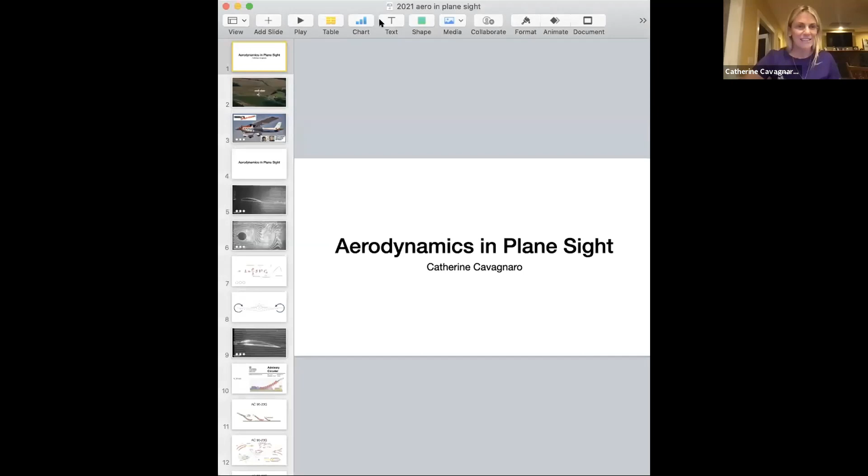Okay, so I have to say that this presentation came together in kind of a funny way. Mike and I played a bit of email tag and such, and so we set this date for me to be here sharing some aviation stuff with you. I don't know if he realizes this, but he wrote me, and I wasn't sure if we had settled on exactly the topic, but he sent me a title that said Aerodynamics in Plane Sight. And I thought, hey, that's cool. So what I ended up doing is thinking, okay, what do I want to talk about that would make sense with this title? Usually the title comes last, but in this case it came first, and I really liked the title.

I am a mathematician, and I teach at the University of the South. That's my full-time job, and I teach aerobatics, and like Mike said, I write for AOPA Pilot Magazine. I am in my happy place when my geeky math side gets in contact with my thrill, adrenaline seeking pilot side. I just love mixing math and aviation. But I'm a very visual kind of person, so I loved the title of this, Aerodynamics in Plane Sight. I love videos that help make aerodynamics accessible and interesting, and I hope you'll agree. So I've built this around some of my favorite videos. It's kind of like watching my home videos.

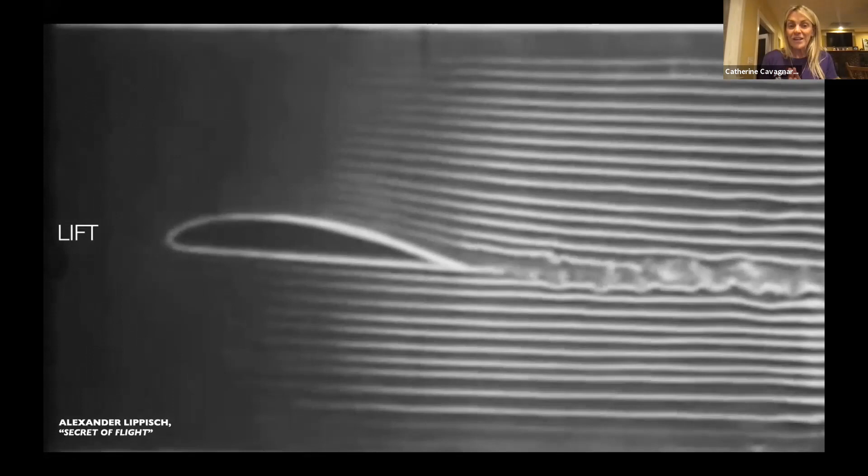All right, here is one of my favorite videos that shows, besides money, what makes airplanes fly. And the lift created by the wing is due to the differential velocity across the top and the bottom of the wing. And what I love about this video, the smoke tunnel video, is you'll see...

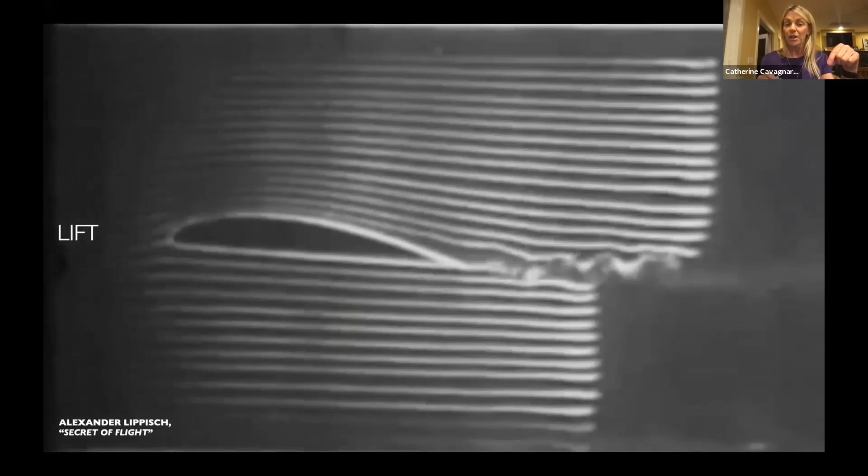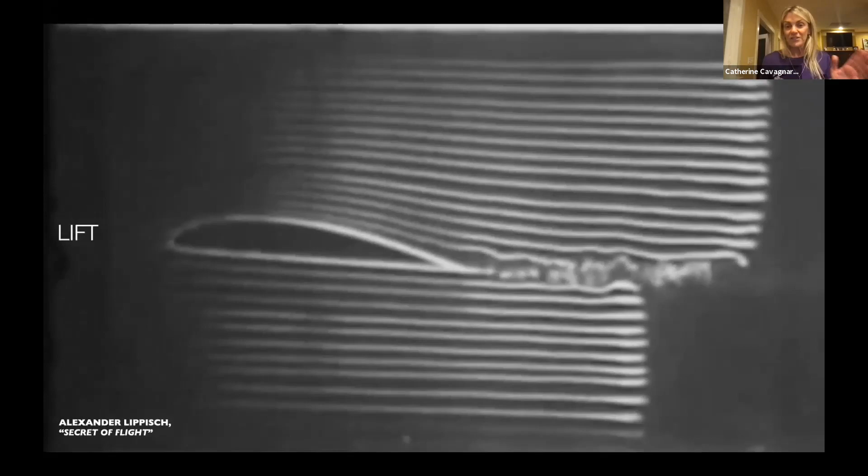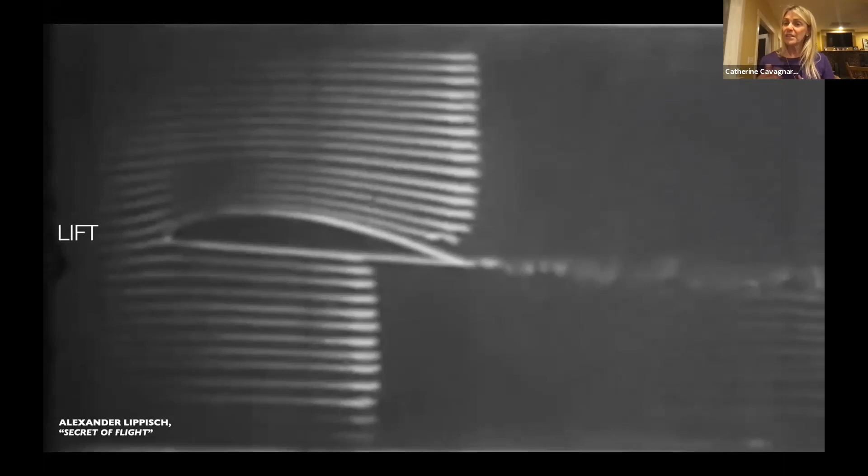If you have 2 molecules that hit the leading edge, and one goes above and one goes below, my old pilot books said that in order for them to meet up again at the back, the one on top has to travel farther, and therefore it travels faster. And that's just false, right? You'll see that those 2 molecules will never meet each other again, because the one that goes on the top goes way faster than it needs to meet up with the one that went below.

I like the video too, because if you just look at that trailing edge on the top, you'll see that the flow just starts to separate. And you'll never get away from that, but you can minimize it by having a pointed trailing edge to our wing. And that's exactly why our wings have pointed trailing edges.

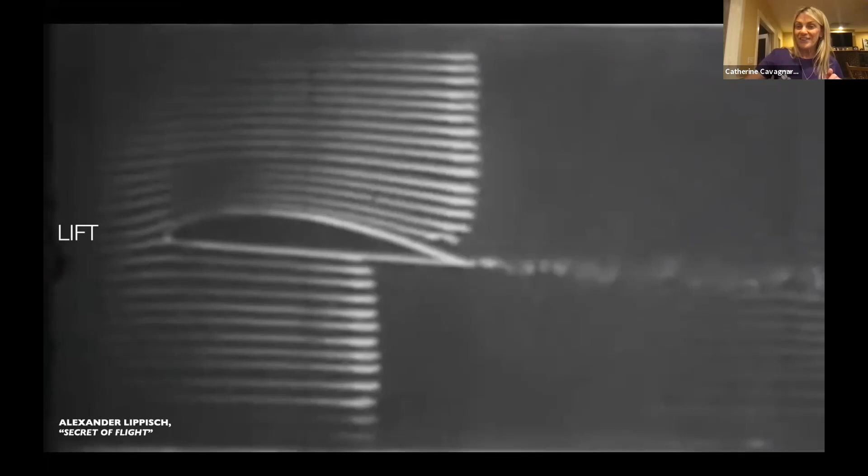So here's an interesting video that shows you what happens potentially when you don't have a pointed trailing edge. And there it is. Oops, I guess I didn't mute it.

Now look at this. All right, I'll say who that is in a sec. Fascinating. This regular motion of a generation of large vortices.

Okay, so I thought I had muted that, but that's Alexander Lippisch, who was a scientist that came over after World War II as part of Operation Paperclip, the same group that brought over Wernher von Braun. So he came over and worked on this thing.

He worked for the Collins Foundation and made some videos. This is one where you see a cylinder, a blunt object, and what you're seeing are alternating vortices coming off the back.

This is exactly what can happen when your object does not have a pointed trailing edge, and that's why our wings do have pointed trailing edges. It takes a lot of energy to create those oscillating vortices, called von Karman streets, and that's an enormous source of drag. But I love that video because I think it's really pretty.

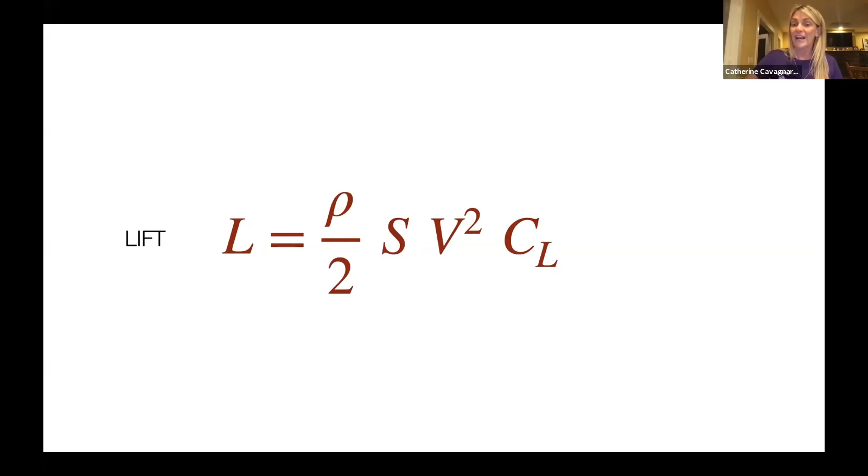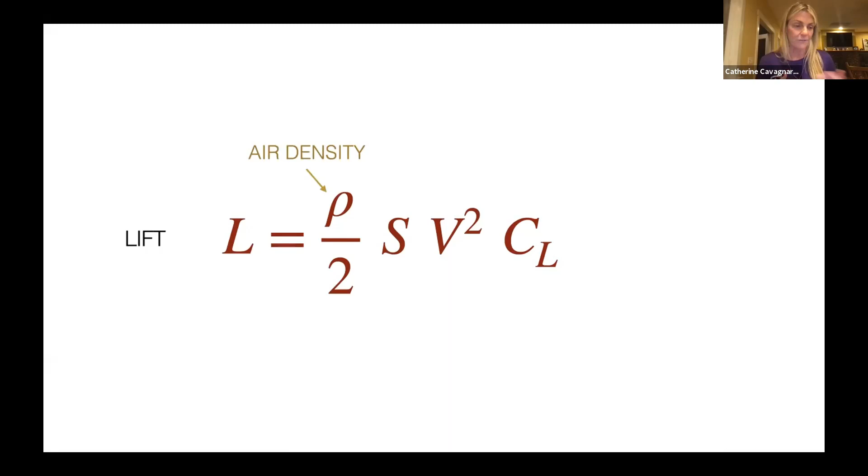First of all, air density. Whenever you have higher air density - so a colder day, higher altimeter setting, lower or closer to sea level - you have greater air density, and so you get more lift. If you've flown January versus July, that's very obvious.

Wing area has an effect on lift too. The more wing area, the more lift you're going to get, although you're also going to pick up drag that way. So that's why you don't see airplanes that have incredibly, bizarrely large wings.

But if you're flying on a certain day, a pilot can't really do much about the air density, and unless you're shedding wing parts, you're not going to do anything about the wing area either. So those are pretty much a constant.

But velocity has a profound effect on lift. And the fact that it's squared means that when you double your velocity, you quadruple your lift. Or said a different way, if you cut your velocity in half, you cut your lift to a quarter.

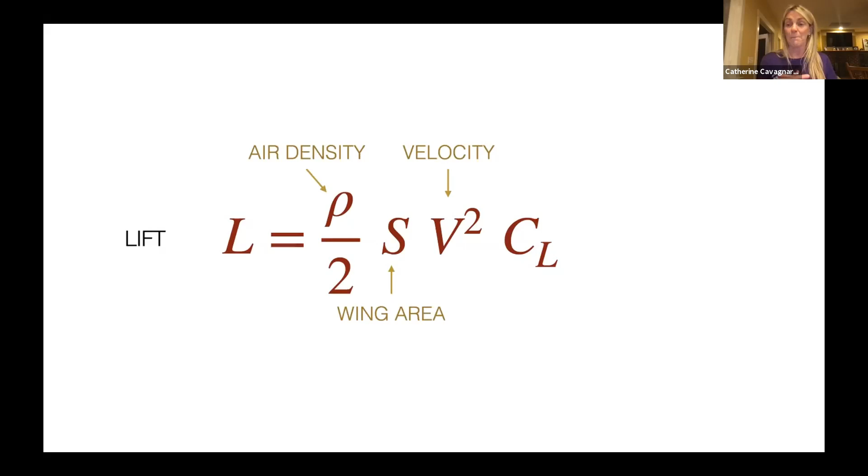That really shows you the extent to which velocity impacts lift, as does coefficient of lift, which you can think of as just angle of attack. As your angle of attack goes up, your coefficient of lift goes up until you get to that critical angle of attack, and then it drops off pretty precipitously after that.

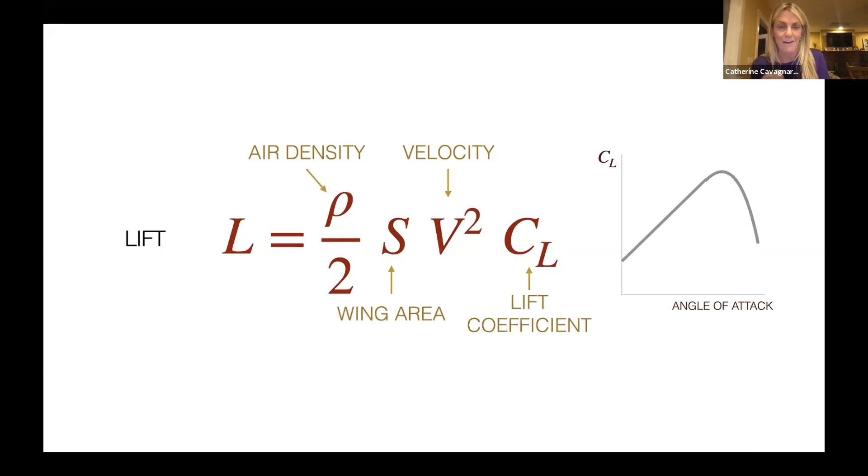All right, so if our wings could somehow be infinitely long, we wouldn't pick up this kind of drag, but you have that higher pressure air downstairs, and it's going to seek that low pressure environment upstairs. So around the wingtips, you have this curling action, and those are called wingtip vortices, as we all know.

You can think of that as an inefficiency. It's the inefficiency that occurs because your wings come to an end. And what it does is it causes some downwash, so it's partly responsible for the fact that your airplane is in essence always flying uphill, so to speak. You can't get away from that, but you can try to minimize it by having long, slender wings, high aspect ratio wings like gliders have.

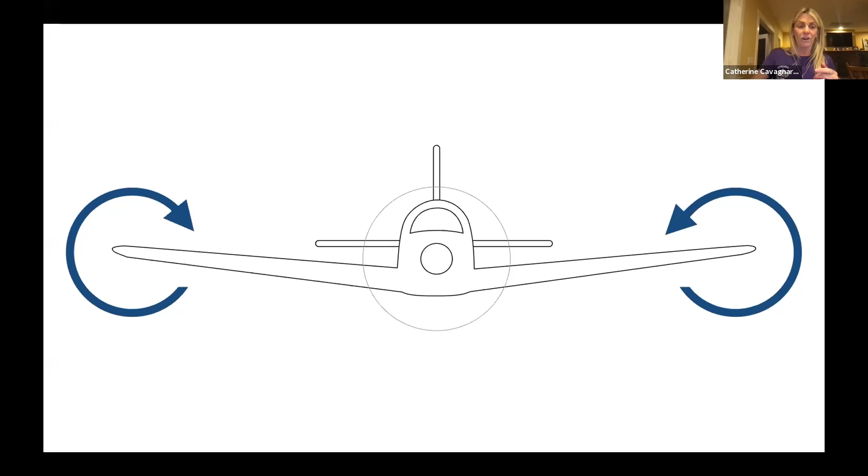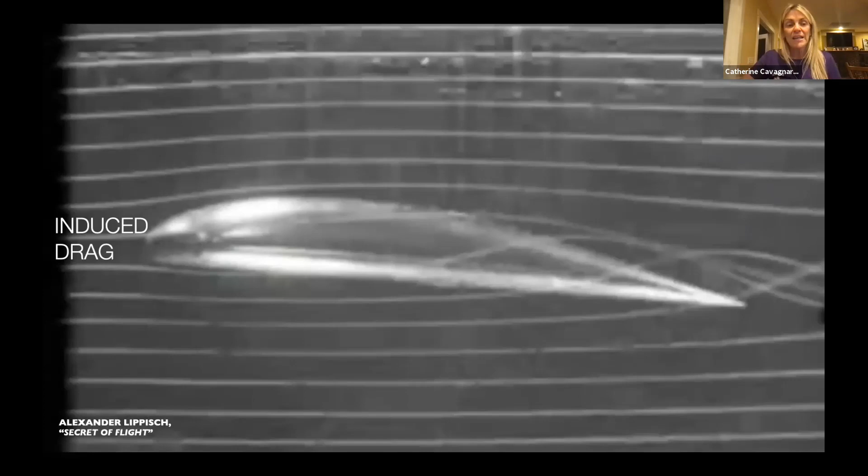That's called lift-induced drag. It's the drag that you incur because your wings are lifting and they come to an end. And I like this smoke tunnel video too, because you can see that as you raise the angle of attack of the wing, that vortex action around the wingtip becomes stronger.

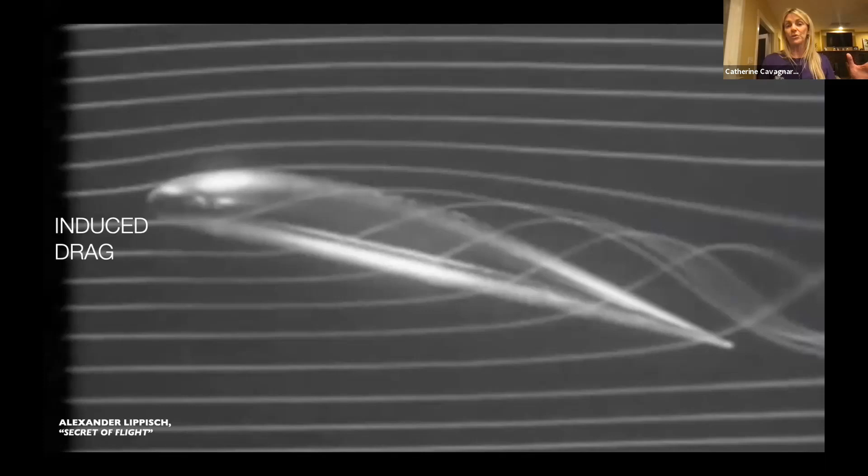So as you raise the angle of attack, in some sense your wing becomes less efficient because you have a greater pressure differential. If you think back to that lift equation, you can get your lift in a number of different ways. One way is to go fast. If you go fast, you can get away with having less wing area and such. So they're all trade-offs.

Not only do wingtip vortices cause a problem for us, given that it makes our flight less efficient, of course they cause problems for other aircraft as well. There's an advisory circular, 90-23G, that is out and has lots of advice.

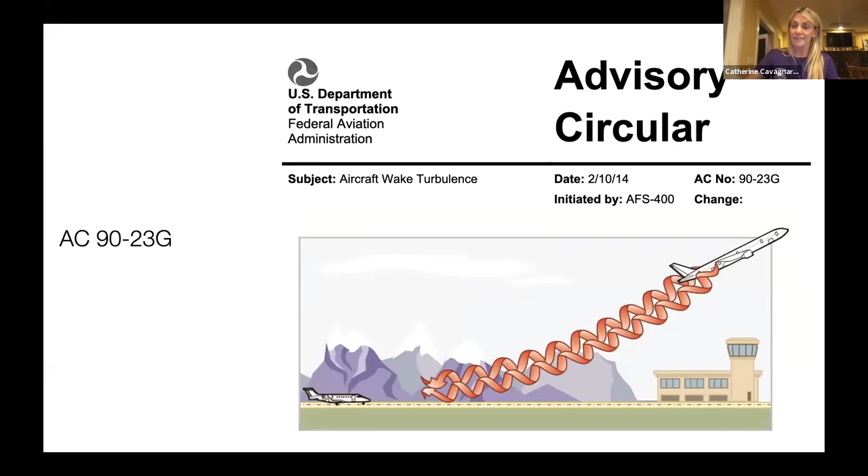So it says that the vortices start when the aircraft rotates and they continue until the aircraft touches down. I'll get to that in a sec, but that's actually not true, but that's what the advisory circular says.

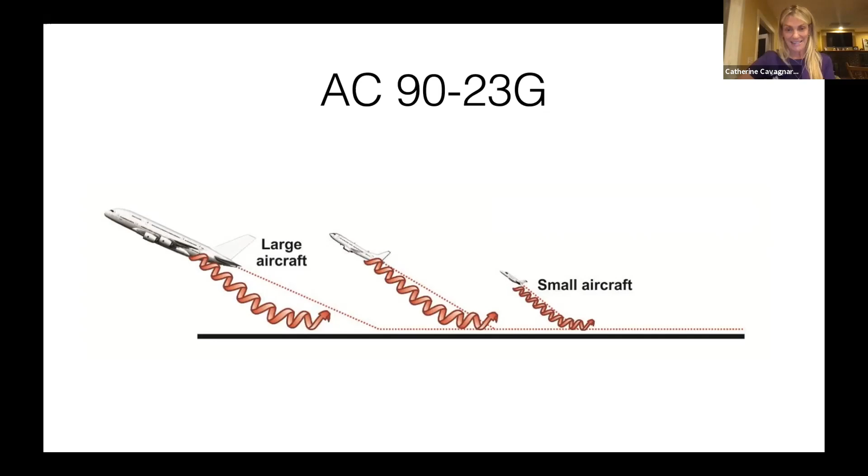And it has all of these diagrams that show, if the airplane touches down here, well then this is a safe zone for you to touch down. And if the airplane rotates here, then you should be okay in this region, but not okay in this other region. It has all of these diagrams like this, but it would be so cool if they were actually real like that. And of course, they're not.

The insidious part about wingtip vortices is that you can't see them. And of course, their placement would be highly sensitive to wind effects, among other effects. I just think if you're trying to imagine where these are to try to safely operate your aircraft, that's kind of not the way to go.

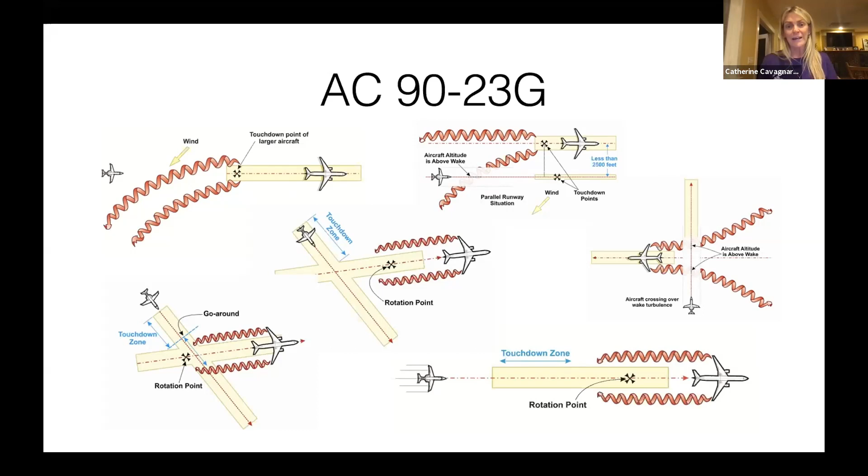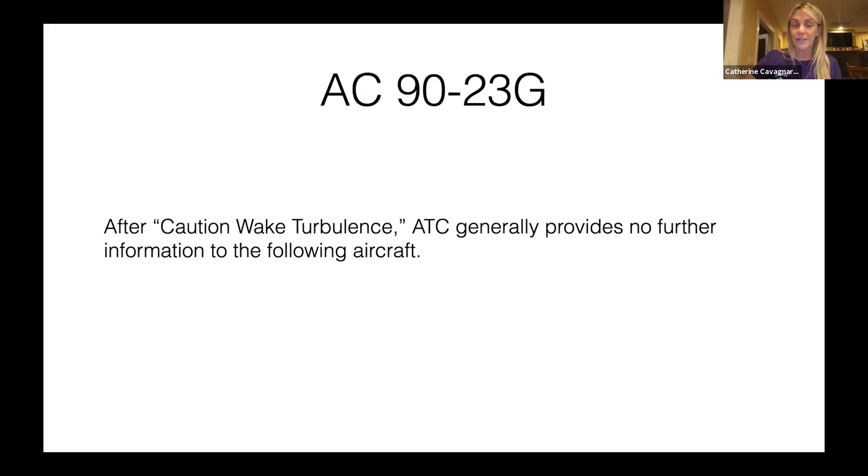There is some good advice in 90-23G that I think is helpful. You should know that after ATC says caution wake turbulence, they generally do not provide any further wake turbulence avoidance information to the pilot. So a pilot is responsible for his or her own wake turbulence avoidance after accepting any traffic information, instructions to follow another aircraft, or a visual approach clearance. So you should know that you're on your own and they're not necessarily going to give you any more information on avoiding wingtip vortices.

It also discusses that wingtip vortices are strongest for an aircraft that's heavy. And that makes sense because if you have more weight, you're going to have to generate more lift, and other things being equal, probably means you're flying at a higher angle of attack to achieve that lift. So when you have that higher angle of attack, higher pressure differential, vortices become stronger. Also when you're flying slowly, since you're typically at a high angle of attack doing that.

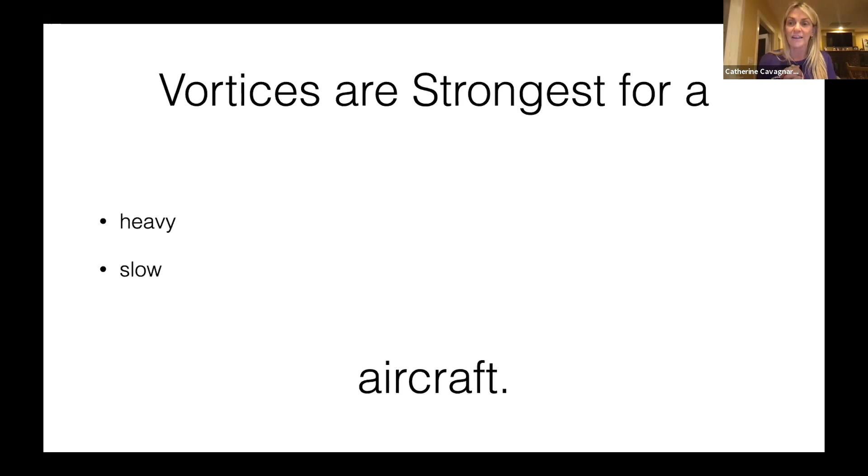Now, for clean or dirty, a lot of times I'll ask the question: are vortices worst when you're clean or when the aircraft is dirty? I don't know if there's any way to do a poll on the fly, but we have a yes, no button. If you can open your participants window, you probably have a yes or no button. So if you think the airplane generates a stronger vortex if it's clean, click yes. And if you think it generates a stronger vortex when it's dirty, click no. Let's see what we can see here.

While I've got you here, Catherine, there was a point made in the chat that lift-induced drag is really because the lift vector generated by the wing is not vertical, but is tilted aft. Yep, that's another way. Is it kind of another way of saying the same thing? It is. Yeah, absolutely, I agree with that completely. In fact, usually I have a slide that has both of those, but that's true. You can think of it that way as well.

I'm seeing about not a whole lot of answers, but I see 4 that say it's stronger for a clean aircraft, 1 that says for a dirty aircraft, and 1 that's a blue go faster button. So I don't know what that one means.

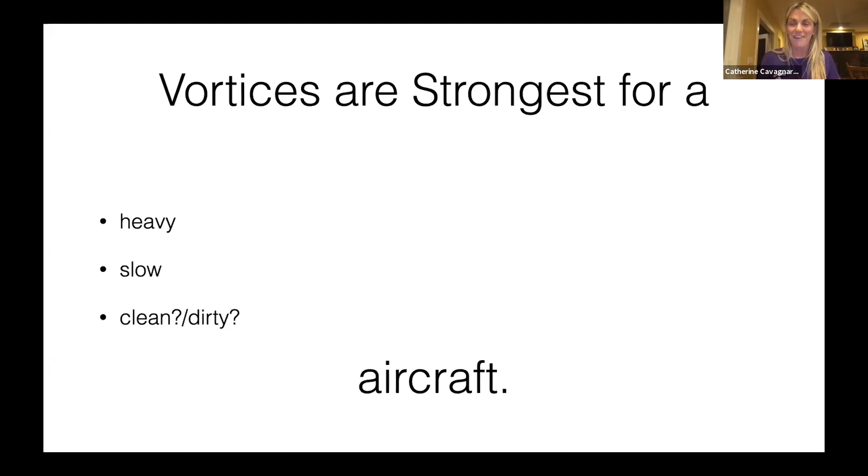Okay, so I will say this, a lot of times that's the one I think there's the most confusion on, and I think the reason is because nobody's ever been given a really good reason for that. I'm here to give you that good reason for it. The answer is clean, and the reason is the following.

Whenever there is a discontinuity in your plan form, in other words, when your flaps are down, and I didn't draw it in this picture, but when this Cessna's flaps are down, there is another opportunity for some of that high pressure air downstairs to leak upstairs.

So when the flaps are down, you have 4 vortices. But when the flaps go up, you lose the ones in the middle and the outer ones become stronger. So that's the reason that clean is worse, because you have 2 stronger vortices compared with 4 weaker ones.

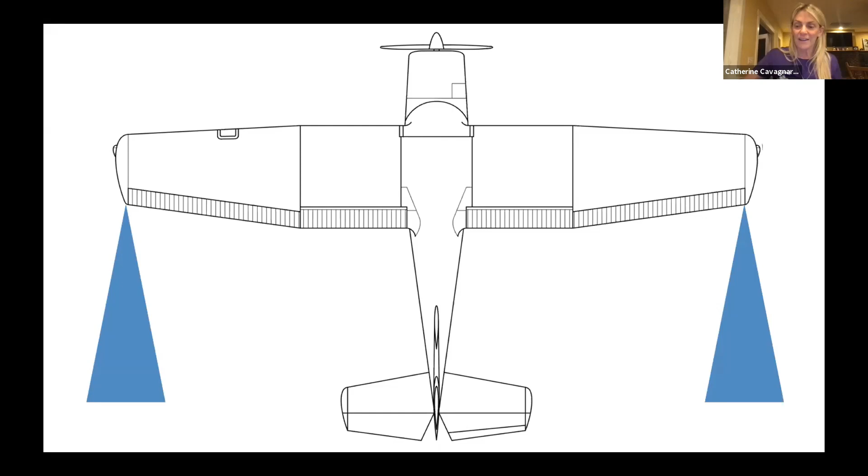And of course, I'm not going to leave anybody just with a diagram. So what I did in this video is I took Wilbur, my aerobat, and I put cones and strings on the edges of the flaps and the edges of the wingtip so that you could see where the vortex action is.

And this is my home airport, by the way, in Sewanee, Tennessee. And I will say that it was a bit of a gusty day. So what I'm going to do is, okay, let me back up.

This video shows 2 things. First of all, it shows that the vortices start on the takeoff roll, not when we rotate. And the second thing is you'll see the 4 vortices.

And when I put the flaps up after takeoff, you'll see that the middle ones go away and the outer ones become stronger. However, it was a bit of a gusty day in Sewanee, and so every time I give an aileron deflection, you're going to get just a little bit of a vortex action. So with that, here's the video.

So we ended up with about an 8-to-1. It looks like eight... okay, people said the green yes. I think that was the clean.

Which one was the first one? I forget which. Oh yeah, my point—I'm going to stop this for a second. My point was that it's not a resounding answer, like usually everybody says heavy, everybody says slow, but then there's a little bit of unknown about clean or dirty. And if you read the manuals on it, you're really not given a very good reason.

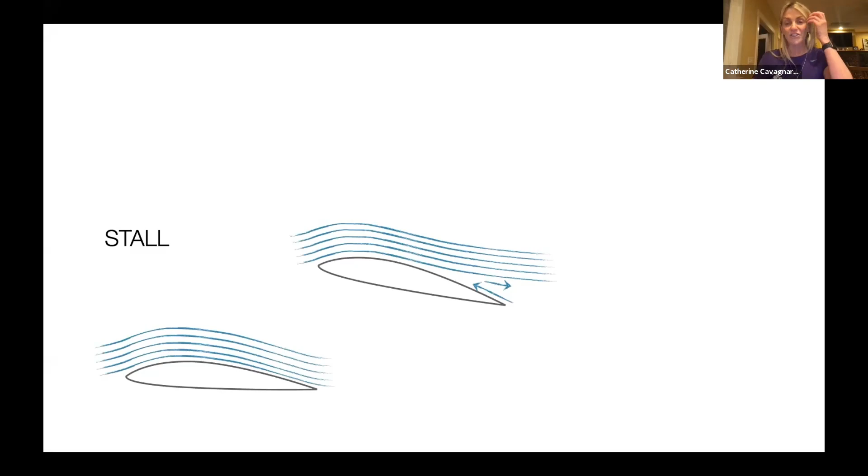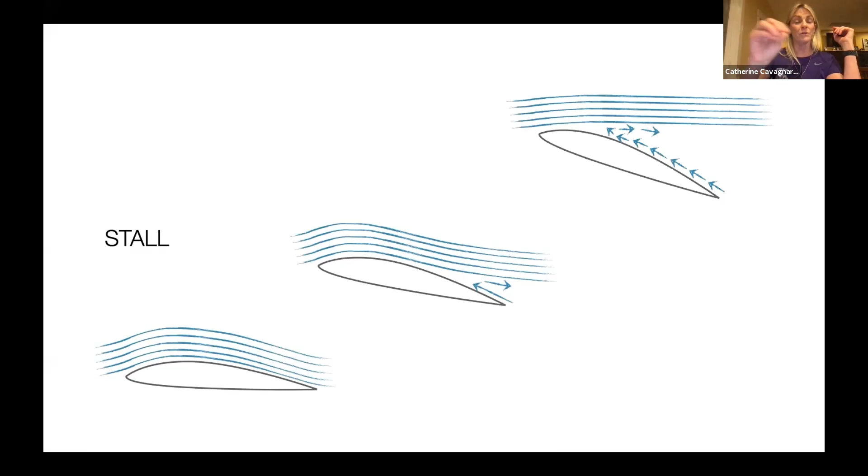Okay, so let's get back to what makes an aircraft fly. Sometimes they don't fly as well as we'd like. A stall happens when you have airflow that's hopefully mostly attached at lower angles of attack. But as you raise the angle of attack, you get a separation bubble that starts at the trailing edge and moves forward along the wing. If you had tufting in there, it would show the flow moving the opposite direction. As you raise the angle of attack more, that separation bubble moves forward even more, and when it envelops enough of the wing, that's when we say the wing stalls, and the lift drops off precipitously after that.

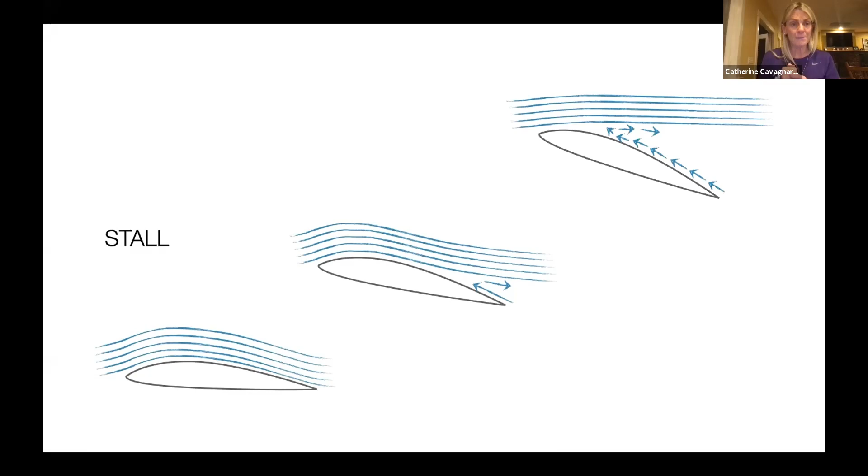Let me try to turn up my brightness here. All right, so here's a wing at some angle of attack, and it looks like the flow detaches maybe about two-thirds of the way back. This will show you that as you raise the angle of attack even more, that separation bubble marches forward, and like I said, the wing stalls. The good news about a stall is if you don't like it, just lower the angle of attack and that flow reattaches nicely.

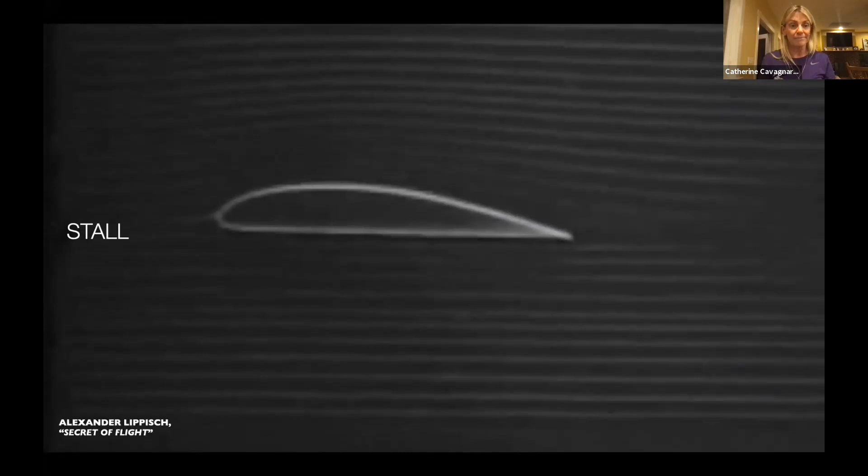We had a question about whether dogfighting pilots receive training on vortices. I think that would be excellent, but I don't know enough to speak to that directly. The F-18 Hornet was derived from the F-5, and Northrop created what's known as vortex control technology. That's the whole reason the F-18 has a Cobra-like hood towards the front of the wing, known as the leading edge extension or leading edge root extension. The purpose is, it's a delta wing, and delta wings are known not to stall - they create a vortex instead. They use that capability to fly at insanely slow speeds, because in a dogfight it's not about how fast you fly, it's about how slow you can go in order to turn inside of a bandit and get a guns kill.

There's actually a story of an F-16 versus an F-18. They were doing what's called a flat scissors, which degenerated from a rolling scissors, accelerate-brake-accelerate type fight. Ultimately both were at minimum speed, both aircraft coming down like a rock, beam to beam. The Hornet, to the astonishment of the Viper driver, stomped his left rudder pedal, pointed his nose at the guy, and took a shot. The only reason he was able to do that was the vortex capability of the F-18, which the F-16 doesn't have to the same extent. Thinking back to that lift equation, where lift is a function of velocity squared, so is turn radius.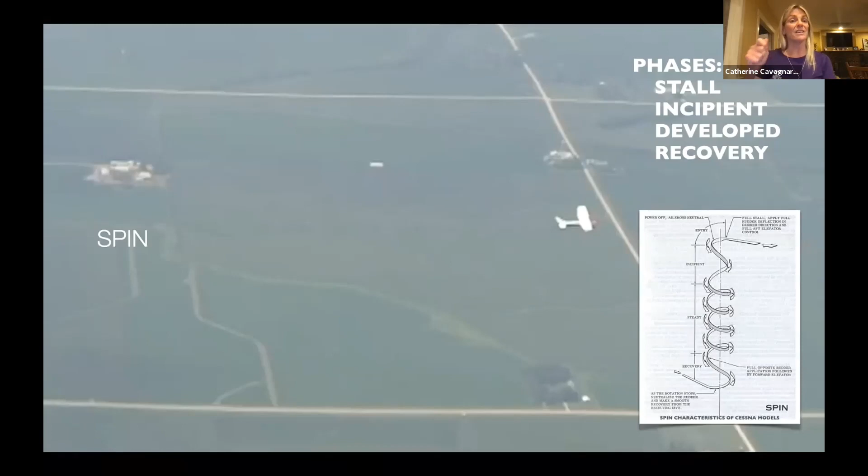And then of course, the phase we want every spin to have is the recovery phase. That one can be counterintuitive, because you see a lot of ground—and in order to recover, I'm going to invite you to see even more. So you're going to have to see more ground in order to recover.

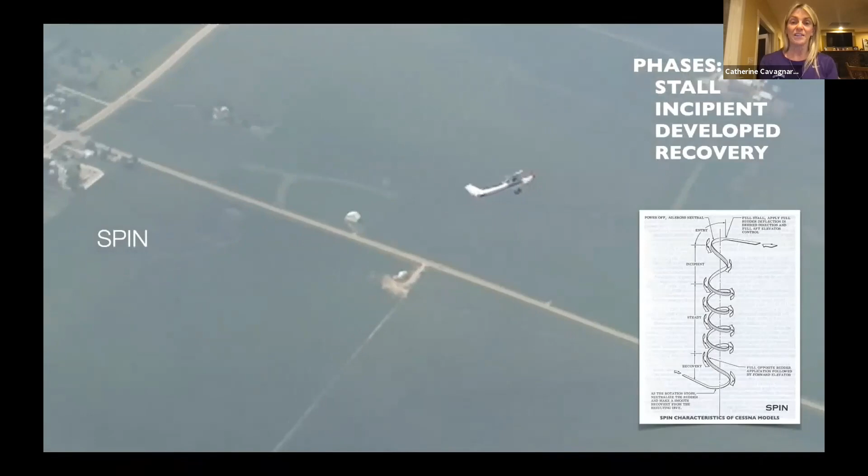So here is what a spin can look like. Here's the approach to the stall. At the stall, I'm going to have a lack of coordination, and you'll see Wilbur goes over on his back, then settles into an upright spin. At this point, he is developed.

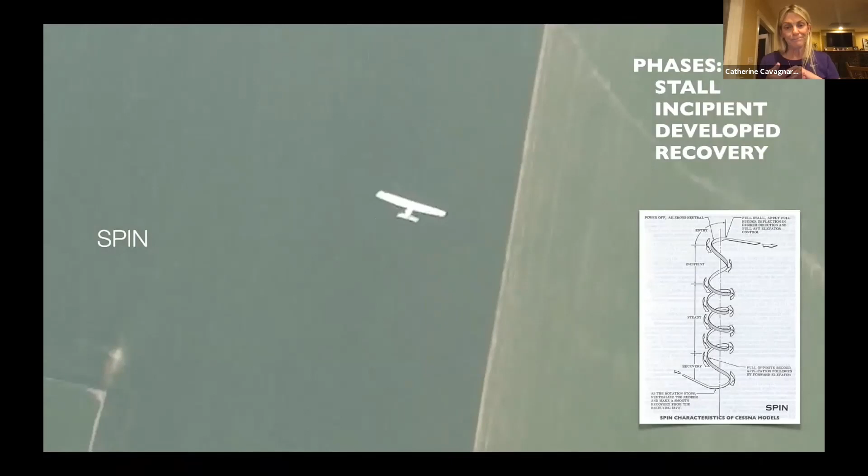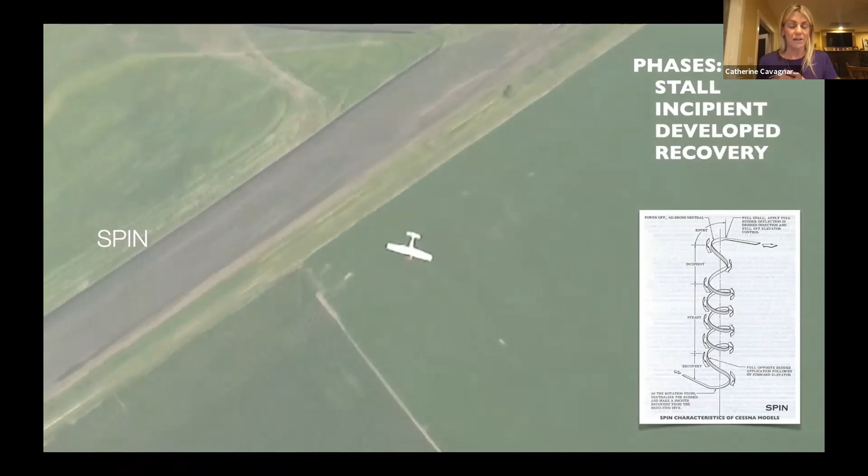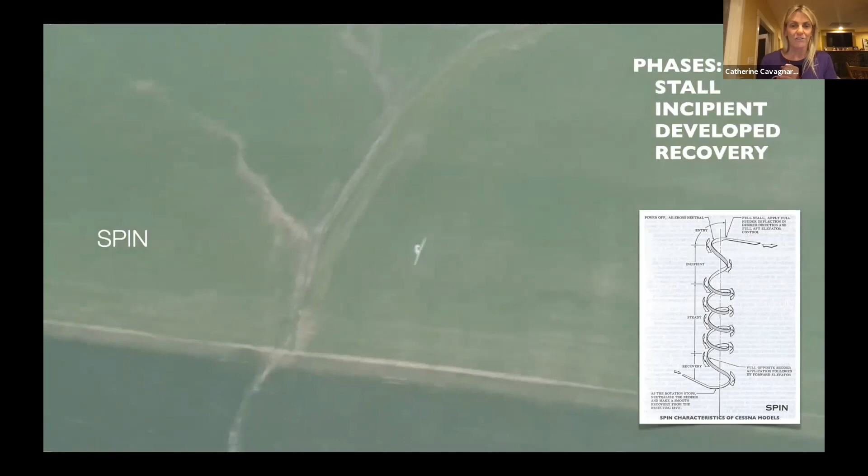So here he is. You'll see in a little bit, the nose goes down, and that flow is going to reattach. Again, in order to recover, you're seeing a lot of ground, but you're going to have to see even more. I think I recovered right about here—nose goes down, we get the flow to reattach, and we can fly away and use the plane again.

Aerodynamically, what's happening is at that critical angle of attack, both wings have that stall critical angle of attack. Now if you introduce yaw into the picture, your outside wing is going more quickly through the air, so it gets more lift. Velocity has a big effect on lift, so it becomes upwardly moving. Your inside wing, which is downwardly moving, has a higher angle of attack. So your outside wing with a lower angle of attack has more lift and less drag, while your inside wing with that higher angle of attack has less lift and a lot more drag. That's the imbalance that sets up and perpetuates that motion.

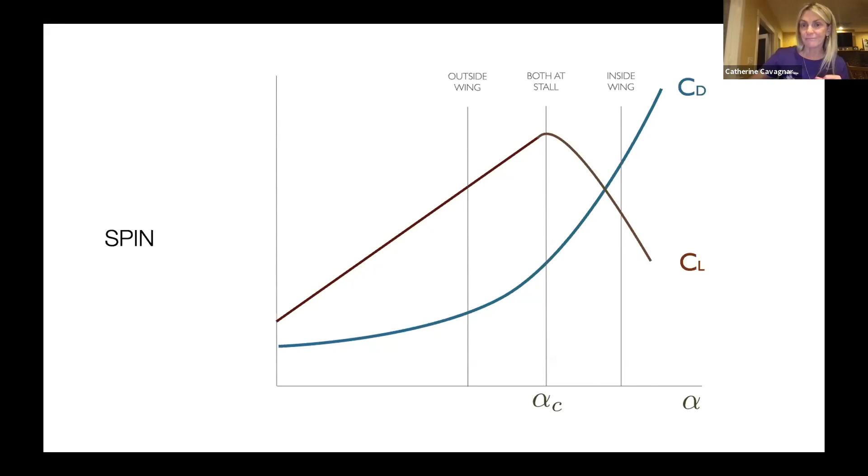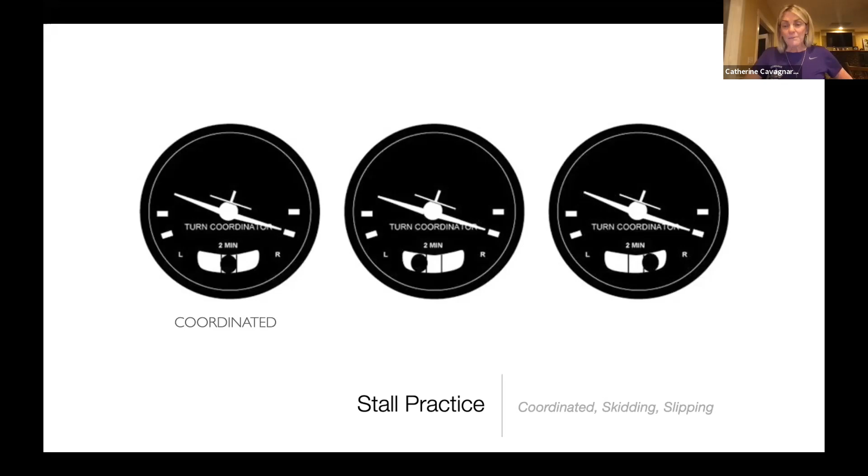When I have a spin or aerobatic student, we always do stalls, and we start sometimes with coordinated stalls. If you're coordinated, whether turning or in level flight, you should not have a tendency for a wing drop. Coordinated means you're just going to come straight down, so to speak. But once we're done with that, I make sure we do some uncoordinated stalls.

I know that stalls and spins can seem mysterious - oh, I get this wing that drops. One thing I try to share with people is that they are actually very predictable.

For example, whenever you are in a slip, that means you're giving insufficient rudder to coordinate your turn. So the ball goes to the inside of the turn, and as you know, we should step on the ball, so to speak. Whenever you're in a slip, it's your high wing that has a higher angle of attack. It stalls first, and you are going to roll over the top.

That's how that works. When you are in a skid, it's your low wing that has a higher angle of attack. And when you stall in a skid, it's going to tuck under - it stalls first, and you'll go under the bottom, so to speak.

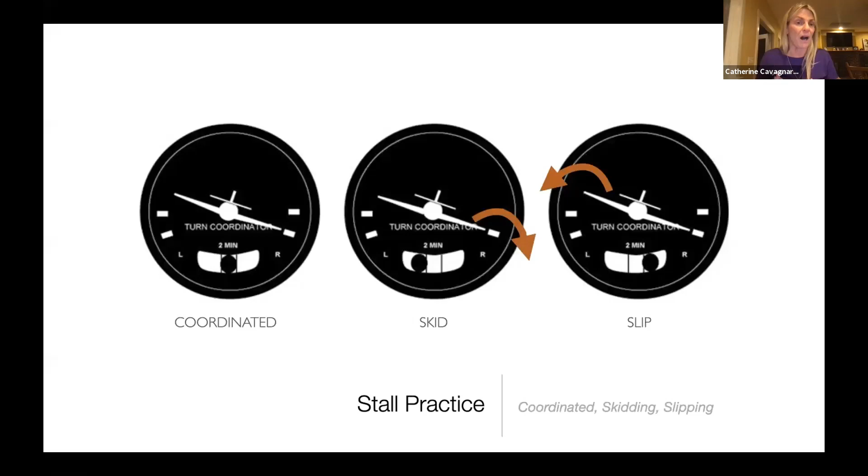So guess what? I've got more videos for this. Here is Wilbur in a slipping stall. I think I even made this slow-mo so you could really witness what was happening. I am in a slip, and you'll see that the stall progression happens from the high wing across, and his high wing stalls first.

I also have a Bonanza - this is my Bonanza Nikki - and I put an extra inclinometer, because I'm that geeky, so you see an extra inclinometer over on the right, because it's a little hard to see her inclinometer on the turn coordinator. So I am turning to the left, and you can see the ball is on the inside of my turn, meaning I'm slipping. You'll see that when she stalls, as promised, her high wing is going to stall first.

All right, and then skidding, as I say, it's the opposite. Here is Wilbur in a skid. You'll see the low wing stalls first, and he tucks under.

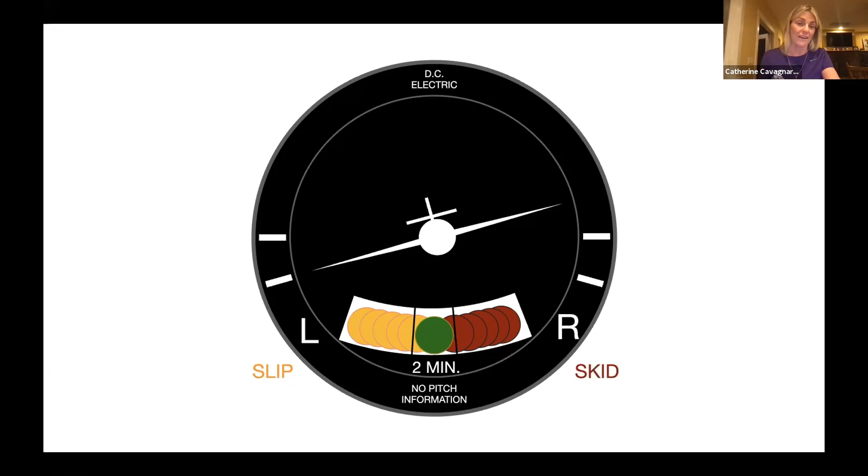Oh, let me set this up.

To show you what the vertical surface was doing in a spin, I tufted that all up too. You can think of that vertical stabilizer rudder combination as another wing. It's a symmetric airfoil, and it doesn't tend to give lift until you deflect the rudder, and then it gets camber and angle of attack, and it's going to lift for you.

So in this airplane, the rudder gets you into the spin, but in order to get you out of the spin, it's got to have some pretty decent flow across it. Here is what that looks like in a spin. Once I get in the spin, just look at the flow across that vertical surface.

So it's not going to be available to me as a lifting surface until I unstall that. And so in this airplane, like I say, the rudder gets you into it, but the rudder kind of leaves you high and dry in terms of getting out of it.

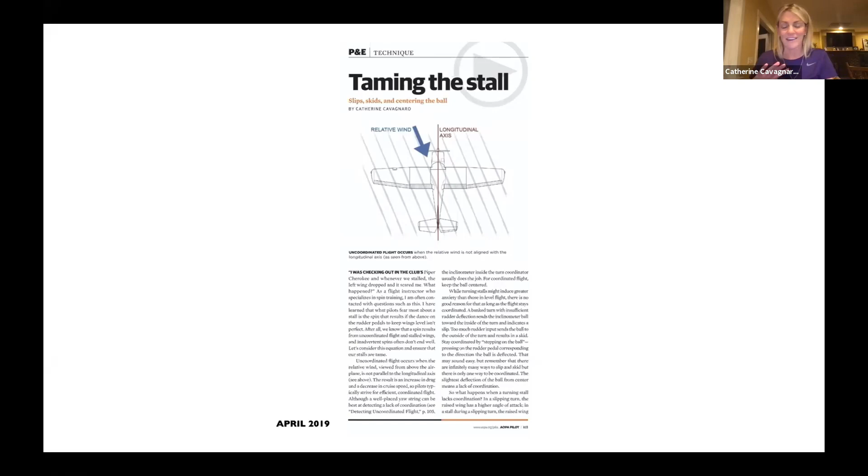And by the way, I featured 4 of Alexander Lippisch's videos. As I said, he came over from Germany after World War II and did some good work for the United States, ended up with Collins Radio, and made these smoke tunnel videos in the 1950s, mid-1950s. I'm a very visual person, and I love when aerodynamics comes alive and I can actually witness it.

So I did this piece to highlight the Secret of Flight videos, there were 13 half-hour episodes, and with a little nudging by yours truly, University of Iowa has put all of them out on YouTube. It's 6.5 hours, 13 episodes. If you get on YouTube and Google something like Secret of Flight Iowa, you'll find the series. I think they are fabulous. Flight instructors, I think they're great to use to help some of those concepts become understandable and interesting. I think they're just fascinating, and every time I go through that series, I learn more about those.

So I just wanted to highlight that article too. If you get a chance to take a look at that, that would be great.